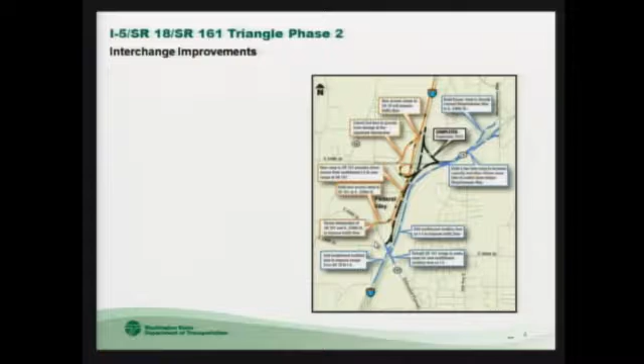So a little bit of history. We received funding out of, there were two funding packages back in the early to mid-2000s. One was the nickel package. Part of the funding for that project came from nickel, and then 2 years later the legislature followed up and provided the rest of the money to fund the projects that are shown in black. Also, a little bit of federal funding also. And in 2013, that project opened.

2013, a little bit earlier than that project opened, we received more money from the state legislature to phase fund, or phase 2, and that's what Hung is going to talk to you about.

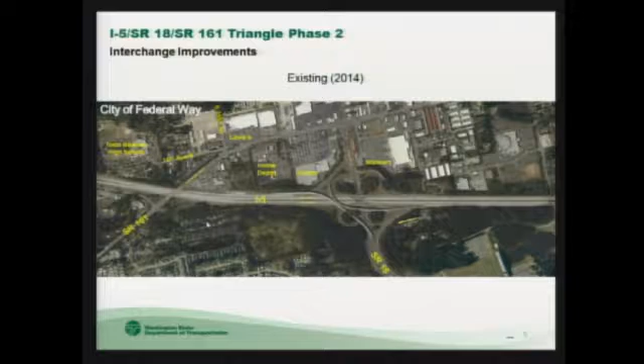So where do we go from here with phase 2? You can see this is where we are today with the project, with the ramps already completed.

When we started phase 2, the vision is that we want to make sure we get traffic going southbound on I-5 to be able to get to Highway 161 one way or another. So we're building this ramp to connect to that existing ramp that's already going to 161, and at the same time, we are building a new ramp to 356. This would get traffic off of that 348, traffic that wants to go east and west, so they can use 356.

In doing that, we will have to build a bridge in this facility to make that connection from mainline I-5 to that ramp. Because of that bridge, we have to modify this loop ramp here. This is the existing loop ramp, and we have to move it so we can make room for this new off ramp at these locations.

To do that, we have to build a new bridge over Highway 18 to make that connection. At the same time, we want to lengthen the lanes here to improve storage at this ramp, because as you know, at this ramp here, the traffic backs up quite a way during peak hour.

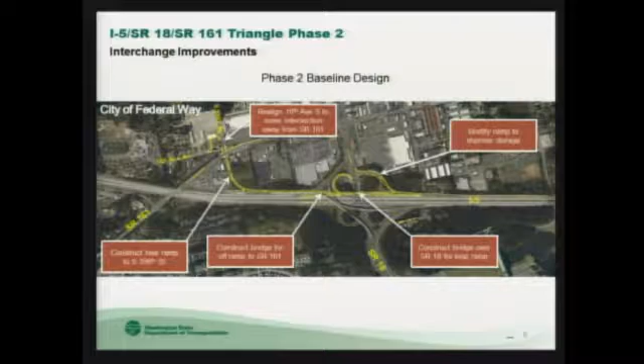So with this new ramp coming to 356, we find out that at least initially we plan to realign 16th, because at that location, the two intersections are really close together. If you're not familiar with the area...

So this is where the new ramp would come off, feeding into these intersections. You can see this two intersections are only 50 feet apart. It's difficult to make it work today already, to try to put the ramp traffic in there to make it all work efficiently and safely.

It's very difficult. So that's the challenge we have to face, and that's why initially we think we would probably have to realign 16th over here, to separate those two intersections a little bit to make it work.

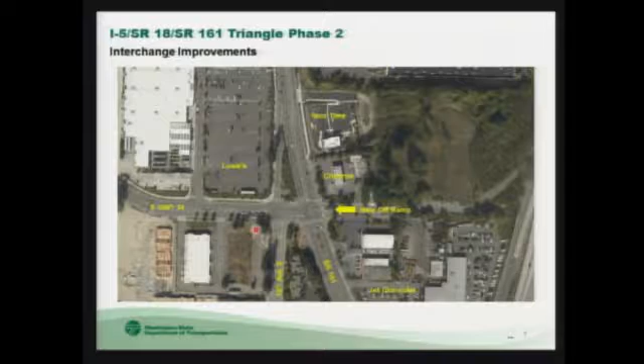And the right-of-way cost, most of it is over here, to resolve this issue with the two intersections being so close together. The bridge cost is right here, because we have a new bridge over SR-18 and a long bridge to connect the ramps.

So, trying to look at how we can move this project along and save money, we conducted a value engineering practical design workshop back in December. Rick participated in that, and we came up with a lot of good ideas.

The workshop made a lot of recommendations. A lot of those recommendations we're going to implement. It's not going to be noticeable to the general public. But there are three that I want to point out to you because they're quite noticeable.

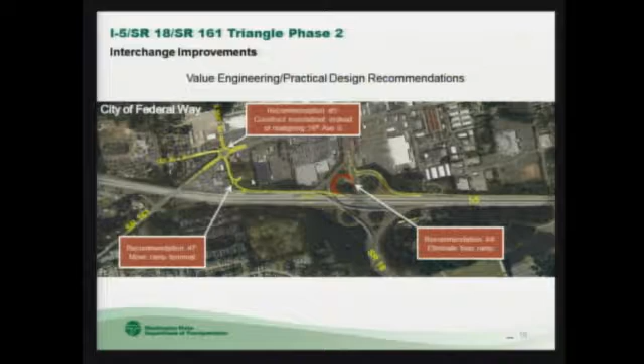But let's look at recommendation number 4 first. So remember, if we eliminate this loop ramp, this is what the project originally proposed. As you can see, we have to build this bridge over to connect to this loop ramp. If we eliminate this loop ramp, we don't have to build this bridge, so that would save some money.

So it would look something like this. We would have the existing ramp widened. There had to be like 3 left turn lanes coming down here, to make sure the operations work.

Some of the pros and cons with this: as we discussed, it will eliminate the need to build that bridge, so that saves some money. When building a bridge, we have to build foundations underground, and when you go underground, who knows what's down there? We do explorations, but we can only do spot exploration. When we start building, we don't know what's down there, so that's a risk we have. We can eliminate that if we don't have to build a bridge. By doing all that, we reduce the construction cost for the project.

It will eliminate the merge on eastbound 18, because currently, when you go eastbound 18 with the loop ramp traffic coming down here, the eastbound traffic has to merge with that loop ramp traffic somehow. So we eliminate that.

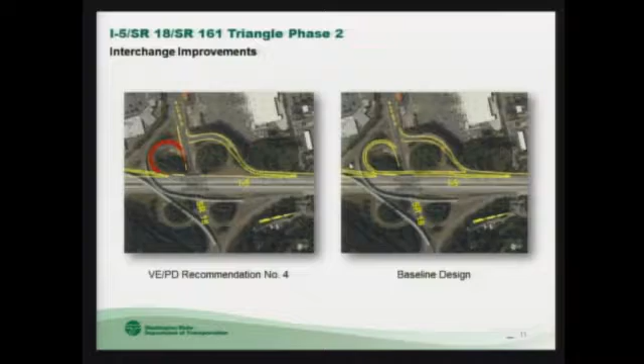Can I, and where's that ramp go again, this ramp, that southbound ramp to 161? Can you show me that full picture right there? Yeah, so this southbound ramp goes to 161 right here. There's an existing signal there now. That's where the ramp from SR18 goes today. And then that ramp will also allow us to go to 356 here.

If I might, the issue here is this ramp here, the traffic's going to be going about 45 or 50, which creates a conflict for the loop ramp traffic that's going to have to slow down to about 20. And so there's standards about how much deceleration length you need when you're coming off the freeway lane. So in order to accommodate both of them, they have to be separated.

So yeah, this was a point the VE team discussed quite a bit. Well, my quick question is, is there consideration for the queue that will build for individuals wanting to go eastbound on 18? Is that going to back up onto the freeway?

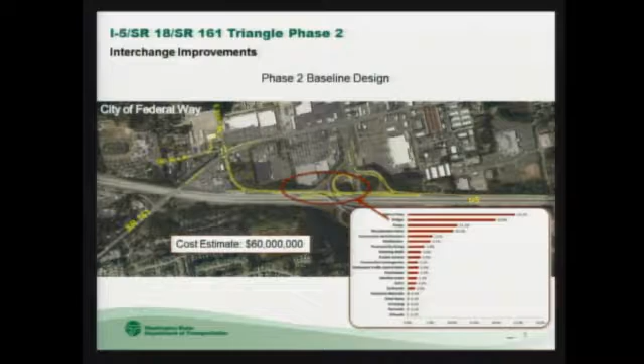That's why it's 3 lanes. Yeah, that's what's 3 lanes. Is that enough inventory? In my opinion, there is already a backup, I think there's already a need for an additional lane if you're exiting I-5 southbound going eastbound on what would be 348th. There's already a need for an additional lane, and there's already backup on the highway. If we add this and add another lane, we're not going to be solving the problem for the backup on the highway. You're just going to be adding more.

And then, do you have something to add to that, before he answers? Okay, go ahead. Yes, Councilmember Salzgeber. So I actually like this solution, and I'll tell you why.

Because right now on southbound I-5 at Highway 512, there's a similar type of arrangement. And I've been through there many times, and that works just fine. I'm sure there's as much traffic going on eastbound 512 as there is on eastbound Highway 18. So I think this is very logical. Yeah, it is a very similar situation there, and actually I think the volumes at 512 on that loop ramp that got replaced are probably higher than what we have here.

It's going to Councilmember Maloney?

Well, I apologize, I don't mean to be disagreeable, but there is enormous backup during evening rush hour right now. And if you add the vehicles that want to go eastbound, what I'm trying to say is there's going to be all of that additional traffic. And then on top of that, a lot of the larger trucks use this as a thoroughfare. They go through Federal Way or whatever, and that's going to be an additional amount going through that light of the 18-wheelers as well. So there was a point when I was standing out on a corner, which sounds really bad, for a reason though, waving signs.

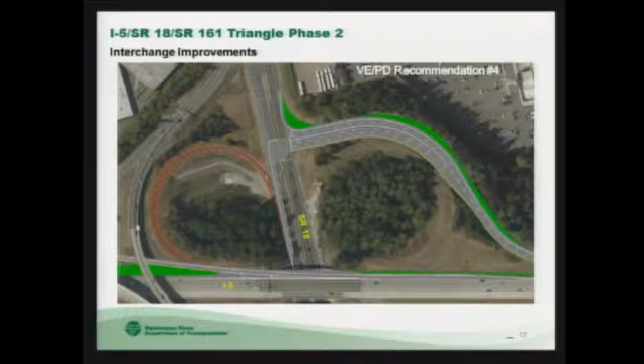So actually, the Sound Transit question has me intrigued, because our council has a very strong—well, we've expressed, collectively but not formally and officially yet—unofficially, we've had a very strong preference for an I-5 alignment for a number of reasons. Obviously the idea of the spine is to run it all the way down to Tacoma. My question is, would there—if that's where the alignment is, because we've made it very clear, and I believe Des Moines and SeaTac have made it very clear too—if there's an I-5 alignment, where would that go in this?

In that corridor study, they talked about having a station somewhere in the vicinity of 352nd, between 99 and Enchanted Parkway. So even if we had an I-5 alignment coming down this way, somewhere near 344th, behind Walmart, it's going to start veering towards the west anyway. So even though it's all very preliminary and conceptual, I personally don't see this as being an obstacle to them.

I could be wrong, but based on what information had been shared in that corridor analysis, I don't think this interchange is going to be a constraint.

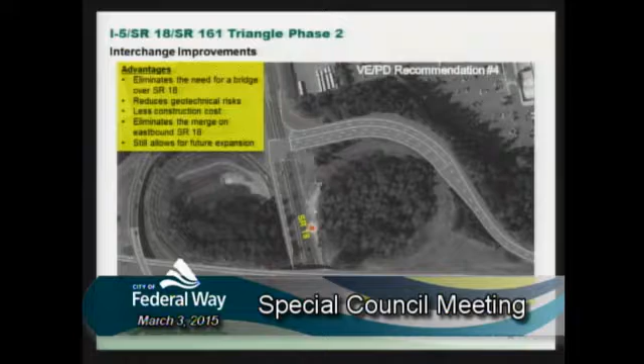So if we implement these recommendations, the only drawback we've seen so far is that it will add some delay to traffic going eastbound on Highway 18, because currently if you go eastbound there's no signal there, you just zip right through. With the signal there, you might have to stop for a red light once in a while.

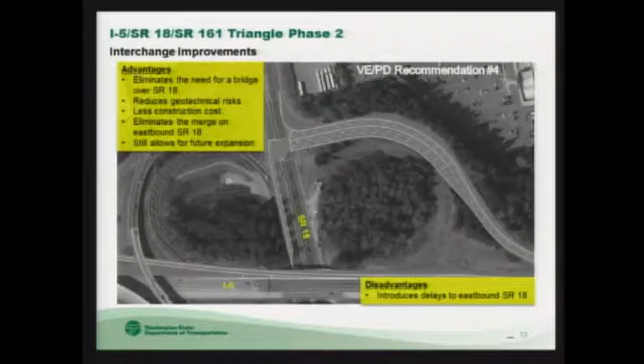So the next recommendation I want to talk about is recommendation number 5, where instead of realigning 16th Avenue to move the intersection away from 161, we build a roundabout instead.

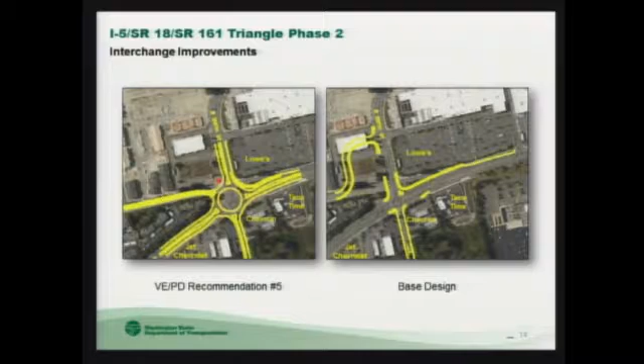Well, let me back up a little. As you can see, if we realign 16th, we would have to acquire right-of-ways to make that work, versus if we build a roundabout, we can reduce that cost quite a bit. So this is a guesstimate for us now, this is what the roundabout may look like. It may change when we're done evaluating it.

One thing I want to point out, all this red line shows what we call limited access. Per the standard, we need to eliminate all driveways within this area, so we have to buy up all the rights for driveways. This could potentially impact a lot of businesses around here - the Chevron's driveway and two other business driveways will be impacted. We're looking into ways to reduce that requirement, but there's no guarantee.

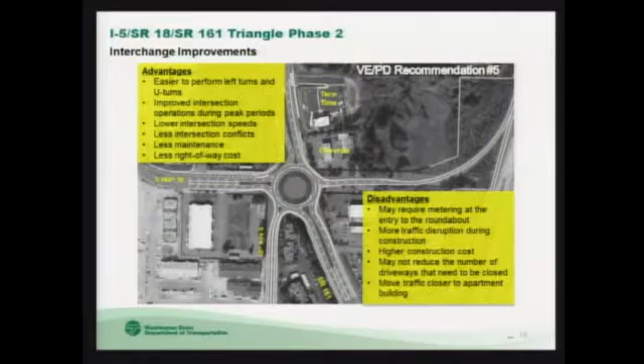As I mentioned earlier, it's really not going to reduce the number of driveways that need to be closed compared to realigning 16th Avenue, and it would move traffic closer to the apartment building. So the last recommendation I want to talk about is the recommendation to move the ramp terminal away from 161.

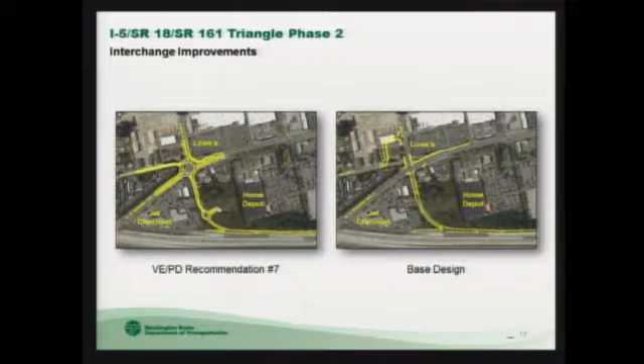One advantage of this is that it reduces the requirement for eliminating driveways around the ramp terminal. As you can see in this display, if we move the ramp terminal to this point, we only have to worry about driveways up to this point. So we wouldn't be affecting the gas station or these businesses as far as closing their driveways.

But there's a lot of hoops we have to jump through before we can make this work. We have to get buy-off from the feds and everybody else, making sure it meets all the requirements we have to have. As I mentioned earlier, one requirement is that it has to be connected to a local street system. Here we're just showing a stub out, but I don't know if that can pass the test of a local street system yet.

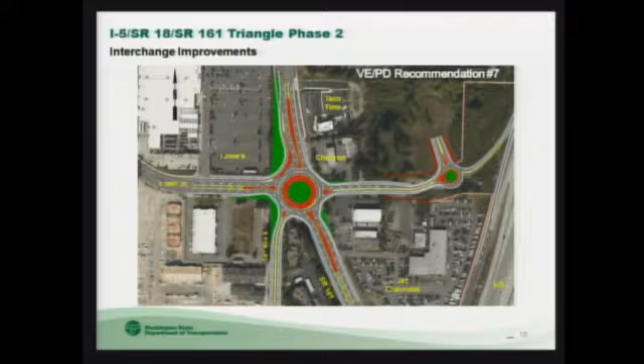Some of the advantages we see with this is that it reduces the right-of-way cost and allows most of the existing business to remain. There's a trucking business in here that's going to be impacted by the project either way, whether we move the ramp terminal or not, because of the ground there, once we build the road we just can't keep the driveway at the grade where they can get in and out of the business.

This would allow us to improve access to this land area back here that's currently owned by DOT, which will probably be accessed once the project is done for redevelopment. The disadvantage is that it will add some cost to the project because we're building another intersection, and we may not be able to satisfy the requirement to have the ramp terminate at a local street system.

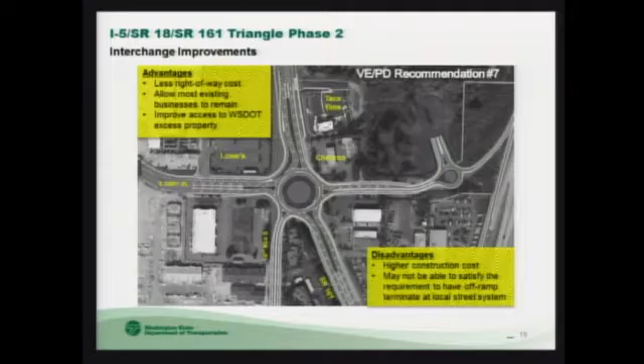So with all that said, to get back to the question earlier, we are going through the process to evaluate all these recommendations and see if any of them make sense. Hopefully we'll get it done by next month, April. After we decide which one is engineering feasible, we have to go out and get endorsement from stakeholders and approving authorities, like yourself.

Once we get all that done, we can go update the environmental documentation and see what impact it has on the environment, the apartment buildings, for example, and all those things. That should be done by around early 2016, and the 30% design should be complete at that time also. After that, we'll proceed with right-of-way and access hearings and get through that process. If we have money, we can acquire the right-of-way.

So back to the question earlier, when would be a good time to come back? I would think probably around this point, where we need to come back to get your endorsement on any recommendation that we think we can move forward with.

All right, Councilmember Honda, and then Councilmember Celski and Moore. First of all, I'd like to thank you for your patience with us tonight and for your presentation.

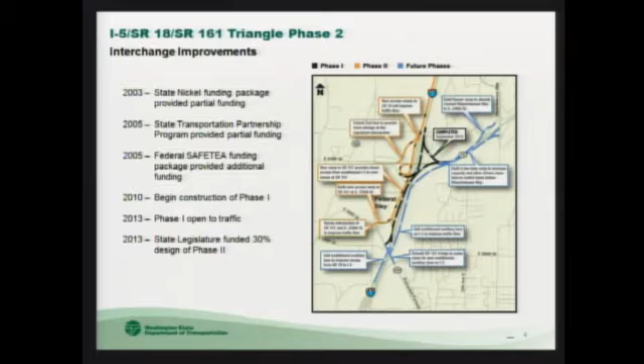That's a future phase in the Senate bill's version, probably not going to get funded — because it's less than what we asked for, and some of these costs are going up in the interim. But it has been very preliminarily designed, so the concept is still there. Probably not in phase 2 for that. Definitely not in phase 2, might be in phase 3. What we're calling phase 2 is the 356th off-ramp. Any future phase might be combined, but not at 85 million.

Councilmember Maloney: I believe Sound Transit is supposed to give us a preliminary idea of where they're thinking the alignment would be in a couple months — isn't that correct? Yep, very soon. So even though things are rather vague right now, could you wait a couple months before these plans continue, since construction wouldn't begin until 2022? The draft EIS for the Sound Transit Light Rail Extension only covers alignment to downtown Federal Way, so the segment from 320th to Tacoma is still not determined. So that wouldn't predetermine anything in regard to that? Exactly.